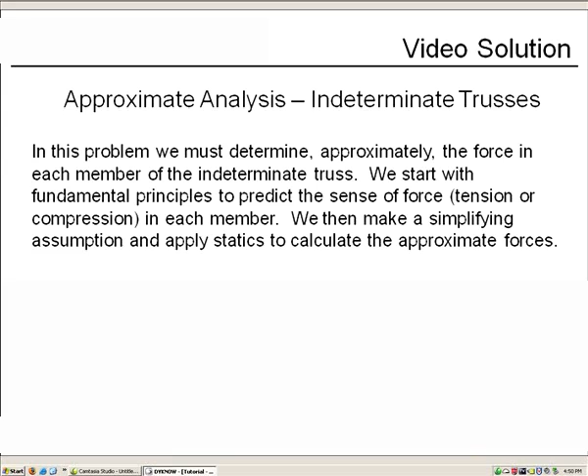In this example, we're going to conduct approximate analysis of an indeterminate truss. We'll start with some fundamental principles that we'll use to predict the sense of the force, that is, whether it's tension or compression in each member. We'll use that as something we compare against when we're all done. We'll then make some simplifying assumptions, and then we'll apply statics to figure out the approximate force in each and every member of the truss. We'll go back, we'll compare against our prediction to make sure we have confidence in our results.

It's a two-panel truss with diagonal members that are crossing. That suggests that it's probably an indeterminate truss. All right, here are the steps we're going to follow. As I said, first thing we'll do is predict the sense of force in each of the members. Then we'll calculate whatever reactions we can. Sometimes in an indeterminate truss we can't calculate all of them initially.

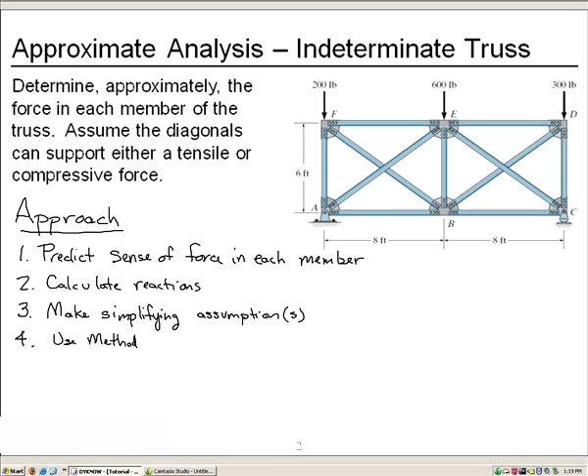We'll make our simplifying assumption. Or, if it's going to be more than one assumption we need, we'll make our simplifying assumptions. During that step, we'll also figure out how many we need. Once we've done that, we'll be able to use statics to find all the other forces. Now in this case, method of sections would have worked, but since we want the force in every member, method of joints works just as efficiently.

When we're all done, we'll compare our results with our prediction from step 1. All right, let's begin. Step 1. We're going to predict the sense of the force in each member.

Okay, so if we consider this truss as a solid beam, let's go back to mechanics of materials. We have our solid beam, pin and roller support, 3-point loads on it. How will it deflect? It will deflect downward in the middle. When that happens, we'll get compression at the top and tension at the bottom, which means when we take a look at our truss, we expect compression in the top chords, tension in the bottom chords.

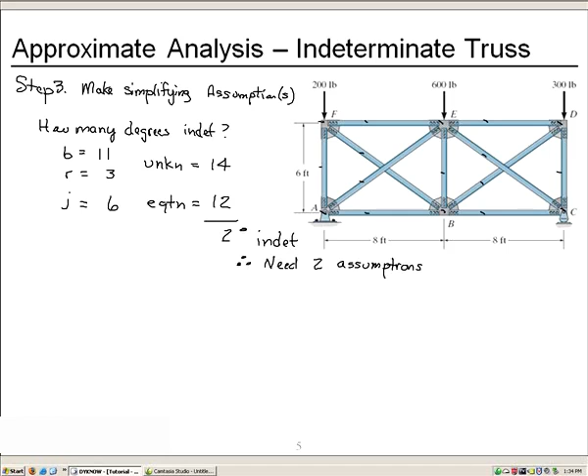Now, equations of equilibrium. We'll count up the number of joints. 1, 2, 3, 4, 5, 6. With 2 equations of equilibrium per joint for a 2D truss, we get 12. Number of unknowns minus the number of equations gives me my degree of indeterminacy. Therefore, since we have 2 degrees indeterminate, we need 2 assumptions. What shall they be? Well, it turns out we're going to make the same assumption, but we're going to do it twice.

Each diagonal in a panel contributes equally to the shear in the panel. Since we have 2 panels, we now have 2 assumptions. Let's see how that works and actually calculate the axial force in each diagonal using our assumptions.

Cut our truss right through the first panel. And let's draw a free body of just the left part. I'm going to consider it more like a solid beam so I can get the net internal force at the cut. We have our 500-pound vertical reaction, our 200-pound applied load, our unknown shear at the cut, and our unknown moment at the cut. I'll apply vertical equilibrium. Have our 500 pounds up, 200 pounds down, and our unknown shear down. Move shear to the other side, solve, and we'll get 300 pounds in the direction drawn. All right.

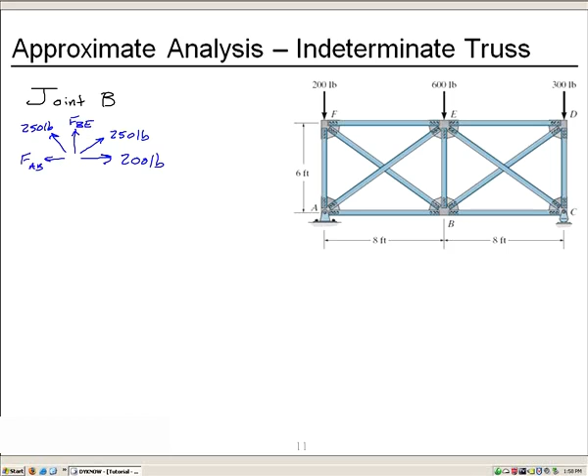So at joint B, I know that the bottom chord to the right, member BC, carries 200 pounds tension. I know that each of my diagonals are in tension with 250 pounds. Don't know the force in member BE or AB. So let's start off by applying horizontal equilibrium. Consider to the right as positive.

I have my unknown AB, and I have the horizontal contribution back to the left, 4/5 of the 250 pounds tension in the diagonal. And I have the horizontal contribution to the right, the 250 pound diagonal, and the 200 pounds in the bottom chord. Well, this and this cancel out. Bring the force in member AB to the other side, and it's a positive 200 pounds. It is in tension.

One left. Sum forces in the Y, I'll take up as positive. We get the vertical component of the left diagonal. We get our unknown member BE, and we get the vertical component of the right diagonal. Put those together, move BE to the other side. This one becomes negative, and it's a negative 300 pounds, which means it's 300 pounds compression.

Let's summarize what we learned in our analysis in steps 3 and 4. Each of the top chords is 200 pounds compression. Each of the bottom chords, 200 pounds tension. Each of the diagonals, 250 pounds. And the diagonals gathering here at point B were in tension. The diagonals gathering up here at point E were in compression.

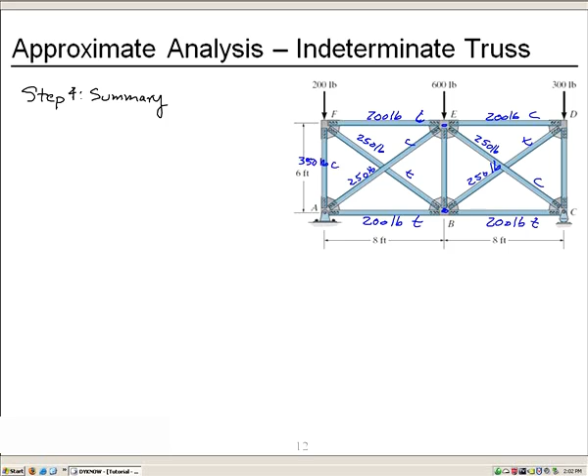My vertical members, we had 350 pounds. That's a 50. Compression here at AF. 300 pounds compression here in member BE. 450 pounds compression here at member CD. So now we're ready for step 5. Let's go back and compare with our prediction.

So carefully take a look at the compression and tension layout. Top chords in compression, bottom chords in tension. All verticals are in compression. The diagonals gathering down at point B are in tension. The diagonals gathering up at point E are in compression.

As we take a look back, it's our results of step 1. Top chords in compression, bottom chords in tension, verticals are all in compression. The diagonals gathering down at point B are in tension. The diagonals gathering up at point E are in compression. Matches our prediction exactly. That's a good sign. Not a guarantee that we didn't make a mistake, but a good sign that we've got reasonable results.

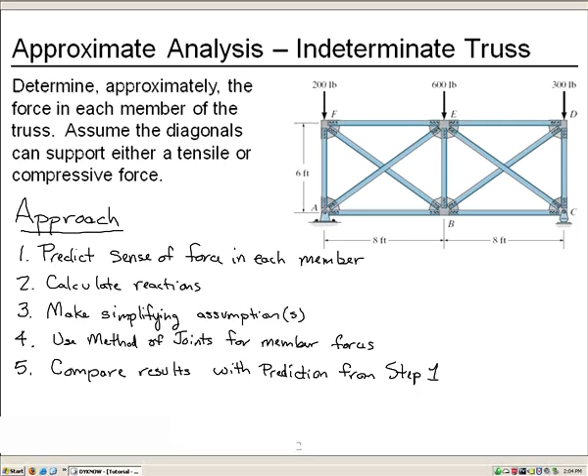So let's review what we've done. We started with prediction of the sense of the force in each member. We used some mechanics of materials, deflected shape of a solid beam to get a sense of where will the compression and where will the tension be. Then we used a qualitative method of joints to figure out what direction or what sense each of the remaining forces needed to be. We wrote down those.

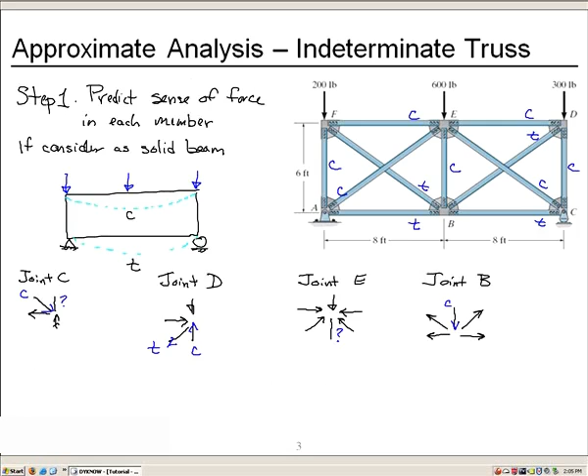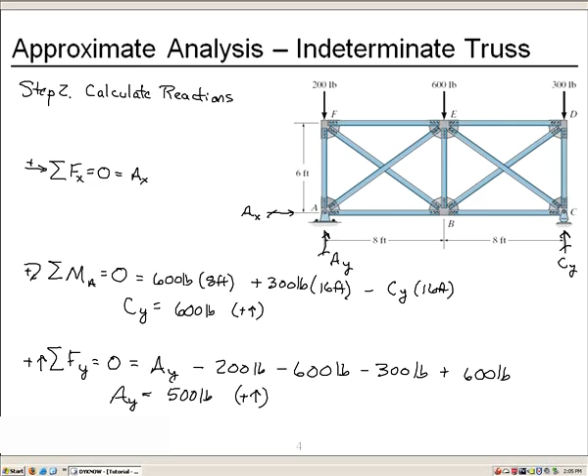Then we were ready to calculate reactions. Turns out we had only 3 unknown reactions with 3 equations of equilibrium. We could calculate all of those reactions. Then in step 3, we had to figure out how many degrees indeterminate is our truss. Because with 2 degrees indeterminate, that means we need 2 assumptions. And we actually made the same assumption twice. And our assumption is each diagonal in a panel contributes equally to the net shear in that panel.

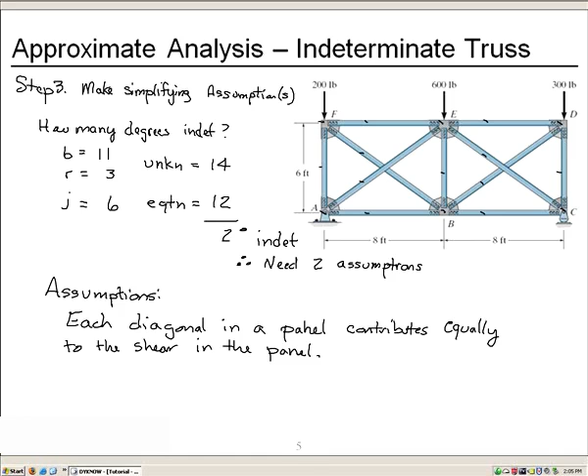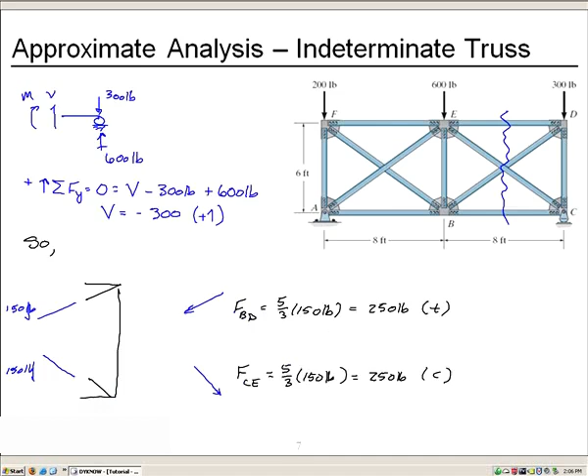Well, to apply that, we had to cut the panel, calculate the net shear, and then we distributed half to each of the diagonals. Based on the direction of the net shear, we could figure out the sense of the force in each of the diagonals. We did that for both panels. Then we were ready to apply method of joints to figure out the rest of the internal forces. We started at joint D. There were only 2 unknowns there. And then moved to joint C. Figured out the bottom chord.

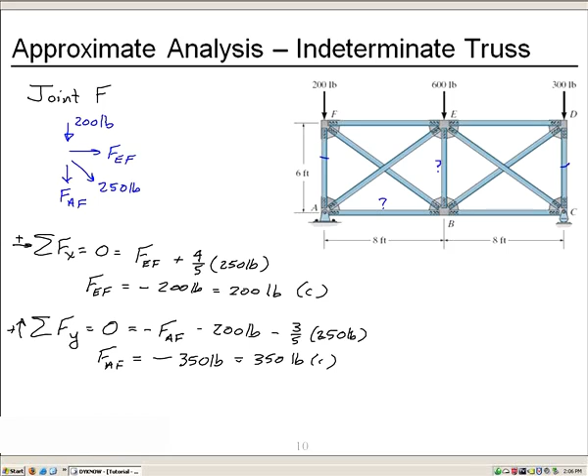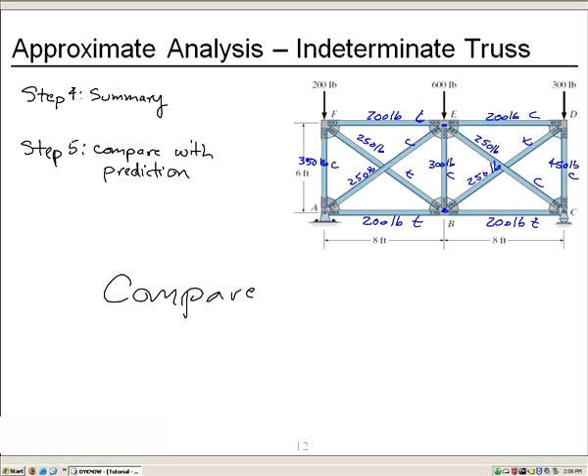By jumping all the way across the structure to joint F, we figured out the remaining top chord and the vertical at AF, and it left us with only 2 unknowns, and joint B contained both of those unknowns, so our last joint was B, and we figured out the rest of our truss forces. We summarized those on the picture of the truss, we compared it with our prediction at the beginning, and lo and behold, it compared well. Great job.